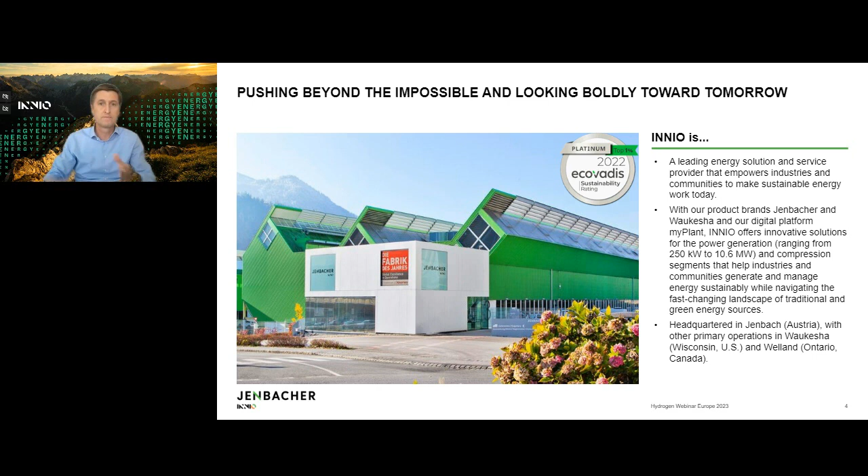Our Jenbacher solutions provide power, heat, and cold for multiple applications worldwide, from commercial customers to utilities, municipalities, IPPs, to greenhouses, to data centers. The worldwide installed base of Jenbacher is 25,000 engines, which produce approximately 37 gigawatts of power.

55% of these engines are installed in Europe, and 55% of these are already today running on renewable gas, including biogas, biomethane, landfill gas, sewage gas, etc.

What this page also shows, respectively the map on this page also shows, are the current commercial hydrogen installations, which are either already running or which are going to commercially run on hydrogen soon. As you can see on the page, most of them are located in Europe, but we also do have installations already in the Americas and in Asia. Klaus Huber, my colleague, is going to talk more in depth about many of those installations a bit later today.

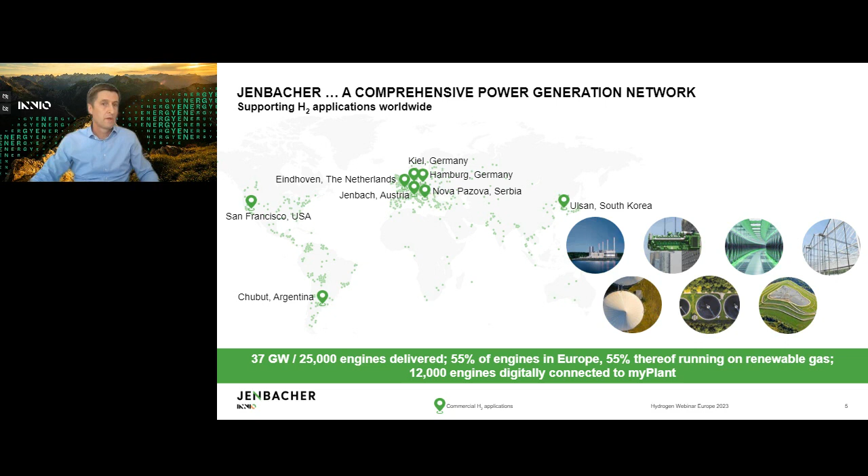Now, about the very dynamic development in the energy linked with the energy transformation in Europe. It is really not easy at the moment for investors in the European energy segment to keep pace with the ongoing fast changes, given all the dynamics around fuel availability, fuel costs, electricity costs, incentives, feed-in tariffs, etc., you name it.

Probably most of you know the main European frameworks which drive the overall direction. These are the European Green Deal, associated with the European taxonomy scheme, and the so-called REPowerEU initiative, with its main focus to reduce Europe's dependency on Russian fossil fuels and also to fast forward the green transition. But there are many other overlapping dynamics and challenges which we face in the energy segment in Europe at the moment. You see those on the right side of the page.

I tried to put them down. For sure, it's not a complete list, but I'll just walk you quickly through those.

These main dynamics and challenges are, of course, the energy supply security in Europe and the energy cost and price rally, which both are major topics since Russia attacked Ukraine last year. Then we have the capacity market needs, meaning the need for fast dispatchable power generation in order to balance the intermittent renewable power coming from PV and wind, photovoltaic and wind.

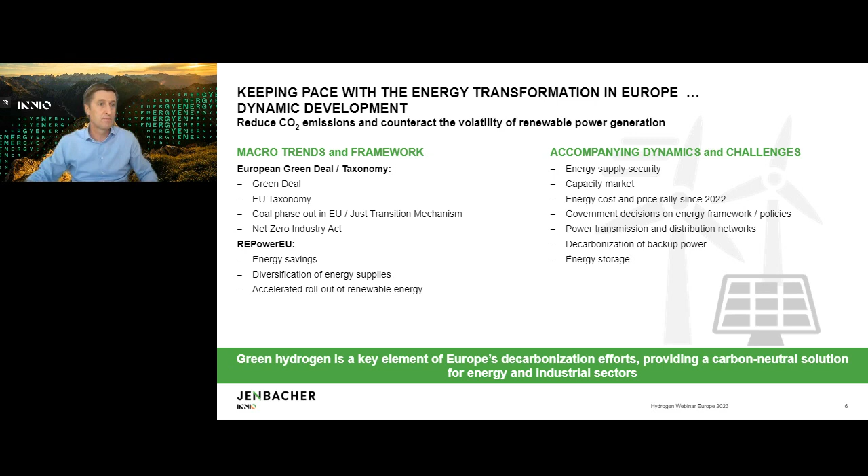I would like to get started with explaining why we need hydrogen for electricity storage. There are a lot of technologies around for storing electricity. The most known is batteries. They are widely used today. But when it comes to larger storages, larger amounts of storage for a longer time, there are other technologies like pumped hydro storage or compressed air storage.

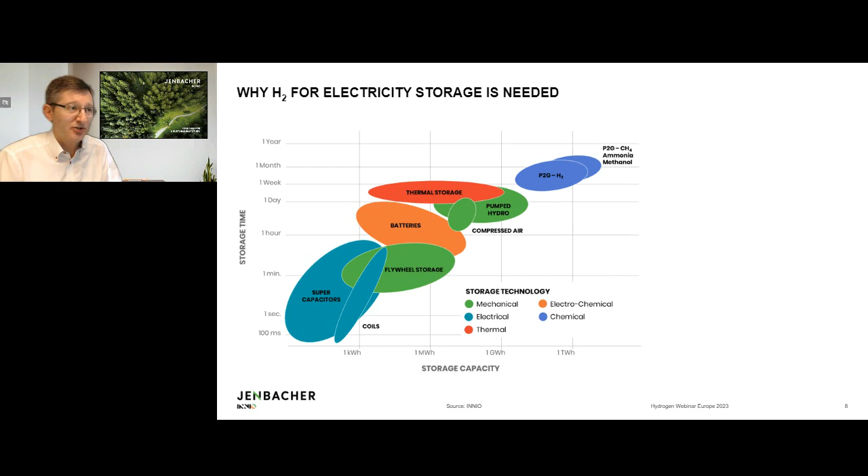And when we go even bigger, to terawatt-hour storage and storage of electricity over months and over seasonal storage, then we end up with hydrogen. Just one example: if someone is looking for 20 gigawatts of electricity storage over just 2 days, then this is 1 terawatt hour. This would be a dark doldrum over 2 days only, but this can last 2 weeks, as we know.

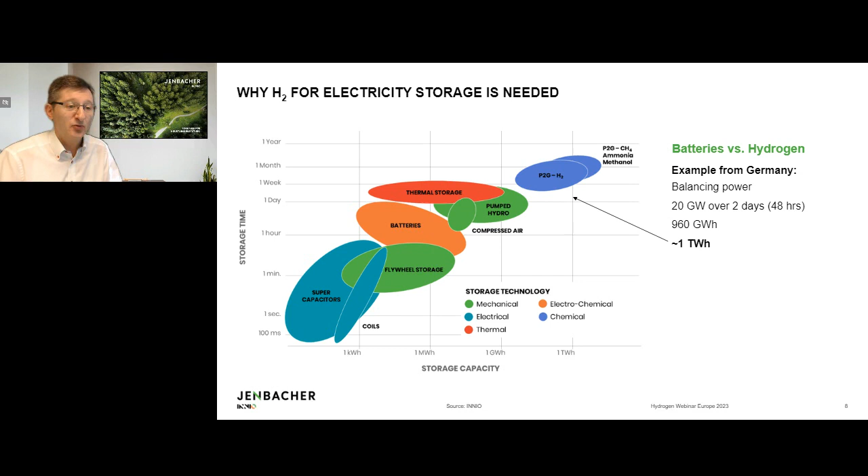So on this chart, you see an example from Germany in 2017, over 3 days, where there was a lot of wind and solar on the grid, but then suddenly this changed and the fossil power plants needed to take over about 20 gigawatts.

And we did a comparison. If one needs to provide 1 terawatt hour of electricity with batteries, that would be a lot of batteries, and just the capex of these batteries would end up with 480,000 million euros. Compared to a hydrogen plant covering this 2 days, that hydrogen power plant would cost about 16,000 million euros, so 16 billion. That is a ratio of 1 to 30 - batteries would be 30 times more expensive.

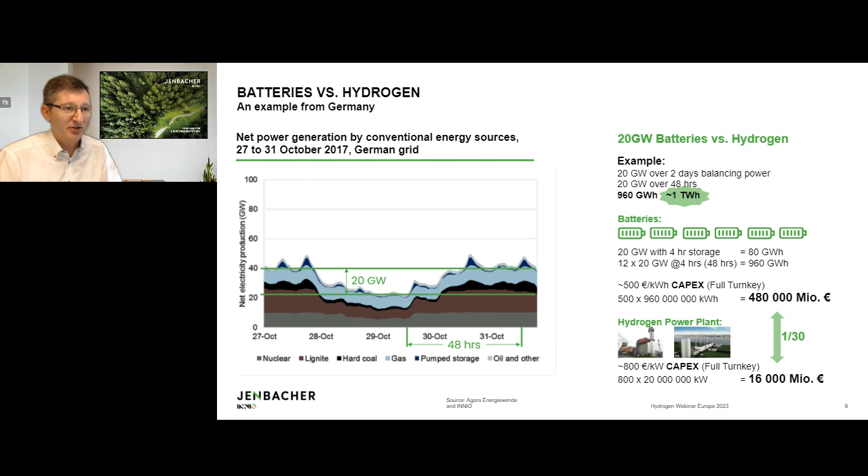That's why hydrogen is needed, and hydrogen is the better solution for longer time and large energy storage.

So when we look at hydrogen, we hear a lot about green hydrogen, blue hydrogen. Blue hydrogen can be produced out of natural gas. Natural gas, we know, is typically directly used to produce electricity, and then electricity is converted to end energy, whatever it is. Blue hydrogen would be produced out of natural gas, adding a steam methane reforming plant, upgrading the natural gas to hydrogen, and sustainably storing the CO2. That ends up with additional power and losses, and as a result, we need more natural gas to produce the same amount of electricity.

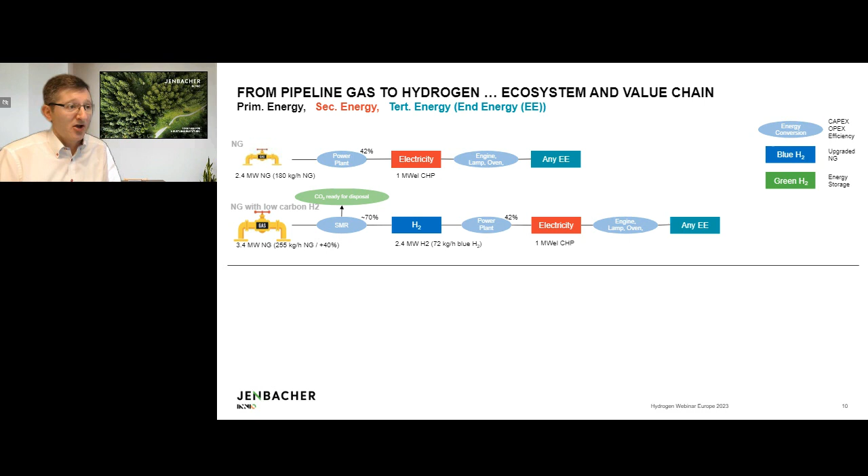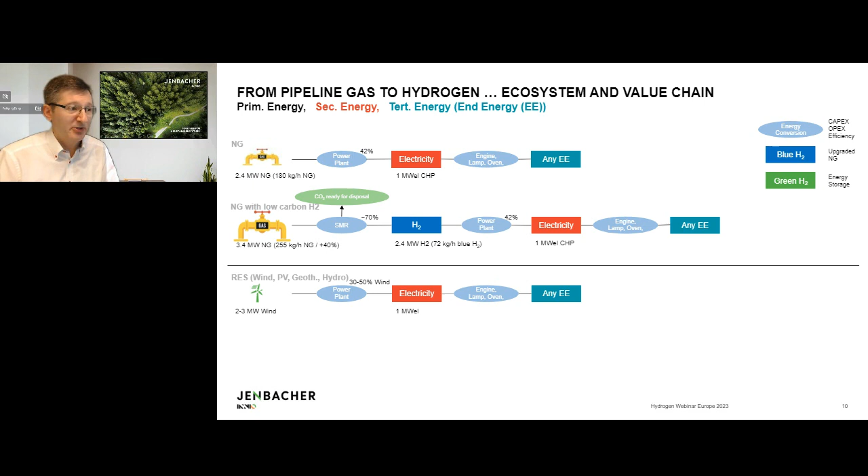More in focus, we have renewable hydrogen. Renewable power will grow significantly with wind and solar, and it is, of course, the best way to use this renewable power directly for whatever we need, the electricity. But for some time, especially for winter times, we need to store some renewable power, and this, as explained before, can be done in large quantities via hydrogen.

Of course, this needs a conversion from electricity to hydrogen. Then you need to compress hydrogen, store hydrogen, distribute hydrogen later on in wintertime to distributed power plants, and then convert it back to electricity. This has a lot of losses with it and ends up with the need for much more renewable power for the same amount of electricity we use at the end. But this is the only way at the moment to do large energy storage, electricity storage over longer time.

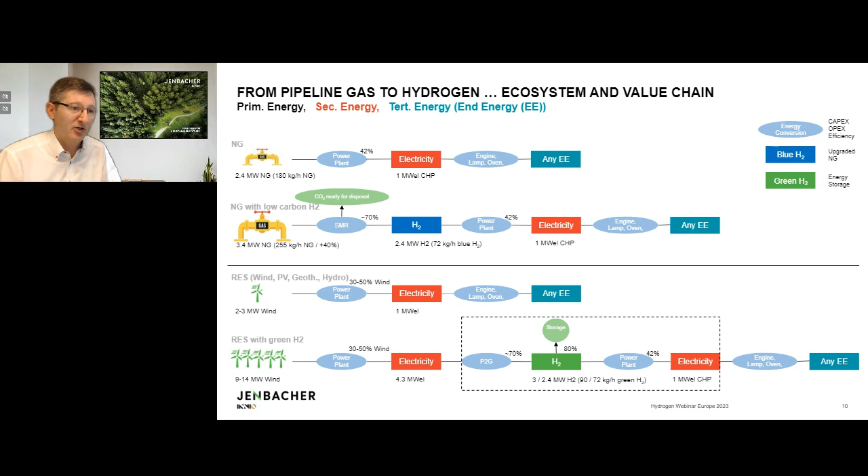Now this hydrogen needs to be stored. There is local storage in tanks, but longer term, a hydrogen network is much more feasible. That hydrogen network is already under development. Hydrogen hubs and hydrogen clusters will emerge first before these smaller networks connect to a big network across Europe.

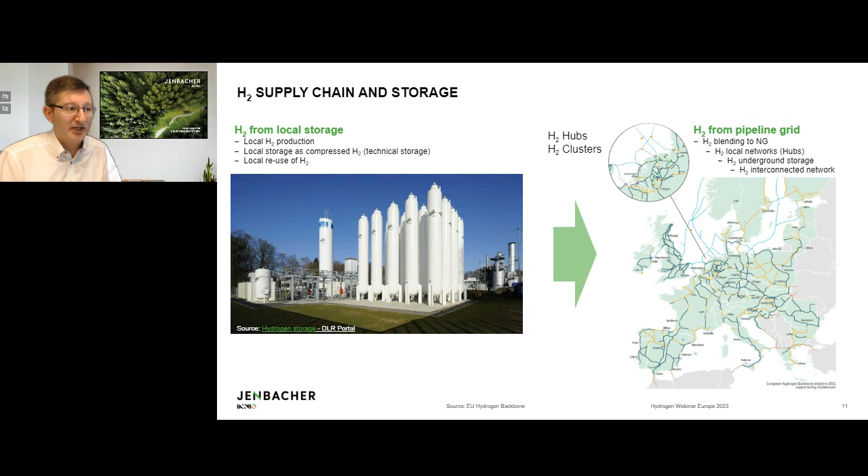Green hydrogen today is pretty expensive, typically costing more than 10 euros per kilogram. In the future, bigger international studies show that hydrogen from green sources could be much more competitive and comparable to natural gas today.

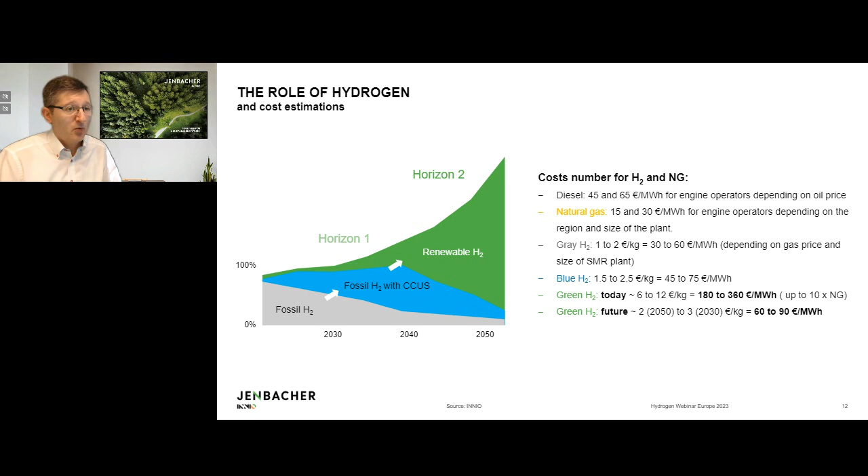So where do we see the most attractive applications for gas engine distributed power at the beginning? We see data centers as an example, where hydrogen could be stored locally and used as a backup solution. But also hydrogen hubs and microgrids could be a solution that emerges first. Then there are industrial applications where hydrogen is available from an industrial process. Islands could also be a solution where hydrogen fits in the early stage.

Later on, when there is a hydrogen pipeline system available and large amounts of hydrogen are available, bigger balancing plants and CHP plants become feasible to run on hydrogen.

So let me show you some project examples of what we do already today. One step back - over the last 25 years, we did a lot of projects with process gases containing a high hydrogen amount. We did 90 projects in 28 countries, totaling 250 megawatts of installed capacity. I'll show you 3 examples.

From the left, those are 4 engines that run on a very high hydrogen fuel, because when we look at this hydrogen-nitrogen fuel constitution, about 95% of the fuel burning is hydrogen. So this is more or less a pure hydrogen engine, and those 4 engines have run over 25 years, all achieving 200,000 operating hours.

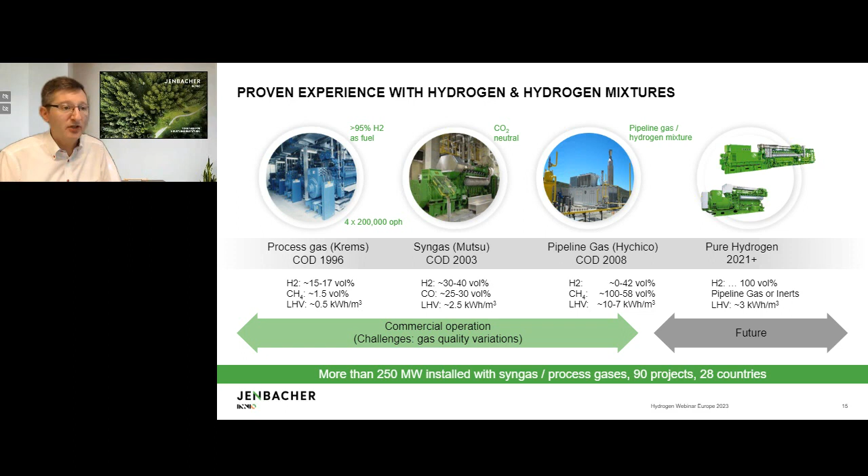Going forward, we're looking more to 100% hydrogen applications. This example with mixing hydrogen to natural gas is located in Argentina. The project is called Hychico. It is a region with a lot of oil and gas activities at the moment, but also with extremely good wind conditions.

About 15 years ago, there was a small wind plant with about 6 megawatts installed, with a very high capacity factor of over 50%. They also installed 2 electrolyzer units with 0.8 megawatts producing hydrogen that is stored underground in an empty gas field. When there is not enough wind available, this hydrogen is used to blend with the natural gas in the local gas engine - a J420 gas engine - which runs with up to 42 volume percent hydrogen.

Up to 27 volume percent of hydrogen, there is no power derating. Between 28 and 42 percent, there is some power derating of the engine. This engine has run for about 15 years now and has achieved more than 100,000 operating hours.

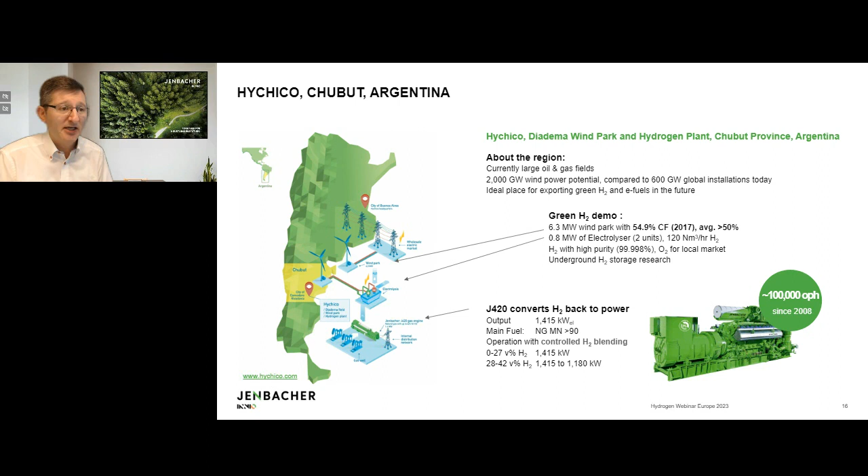This is a picture from the site in Argentina. On the very left side you see the J420 containerized solution. In the middle you see these electrolyzers. Then there's an oxygen plant as a byproduct from the electrolyzer. And on the right-hand side, you see some pictures.

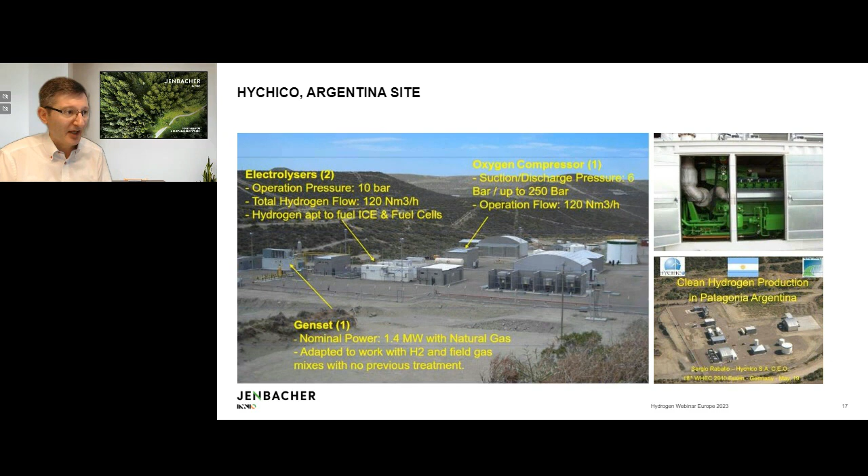At 100% hydrogen, there is some derating of this engine to about 600 kilowatts, but the total efficiency is about the same. What's very interesting is the NOx emissions went down: on natural gas this engine runs at 250 milligrams, on hydrogen below 100 milligrams per normal cubic meter.

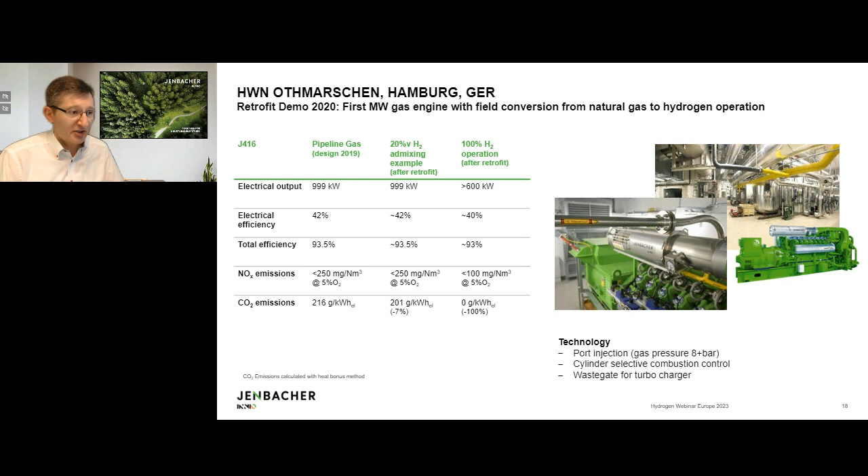Matthias will talk a little bit more about what technology is needed to run this engine on 100% hydrogen.

Another engine, this J420 engine, is already delivered to South Korea. This engine can run on both fuels, pipeline gas as well as 100% hydrogen. It shows the same output because it's optimized for the same output on pipeline gas as well as on hydrogen. It has a little bit lower electrical efficiency because it is a 60 Hertz application and a customer-dedicated genset solution. This engine uses hydrogen from a byproduct of polypropylene production and is installed in Ulsan, South Korea.

The engine is already delivered and will go into commercial operation in summertime.

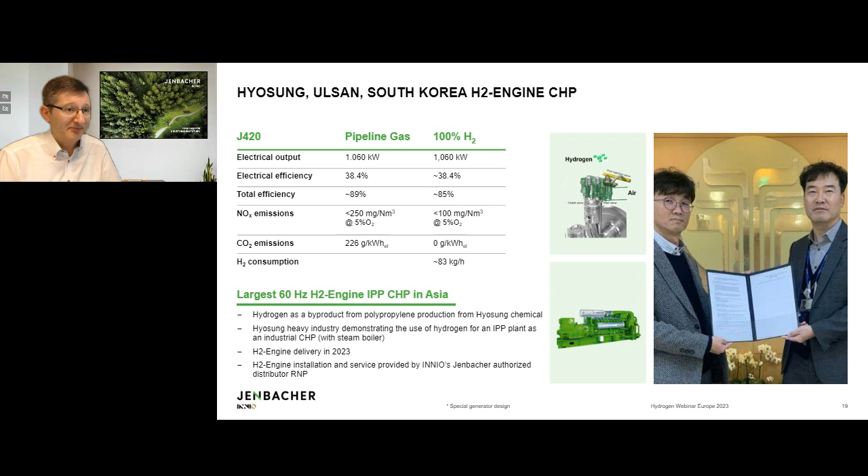A very exciting project is this with NorthC Datacenters in the Netherlands. As I explained before, data centers are a focal application for us because this could be a very emerging solution for hydrogen engines. This customer runs about 15 local data centers, smaller ones, not large data centers, in the Netherlands, Germany, and Switzerland. They want to be completely carbon neutral until 2030. At the data center in Groningen, they installed some fuel cells, but at the new data center in Eindhoven, they selected 6 Jenbacher hydrogen engines.

These 6 hydrogen engines each produce 1 megawatt. As you can see on the right-hand side, there's a hydrogen supply, typically by trucks today, because there is not a hydrogen pipeline available. There's a local storage of hydrogen, and out of this local storage, the 6 engines can run about 1 hour.

Typically, electricity failure takes less than 1 hour, so we estimate about 80% of electricity failures where a backup solution is required can be covered with hydrogen. But in case the electricity failure takes longer and the engines run out of hydrogen, the engines can smoothly switch over to natural gas operation and continue to provide backup power.

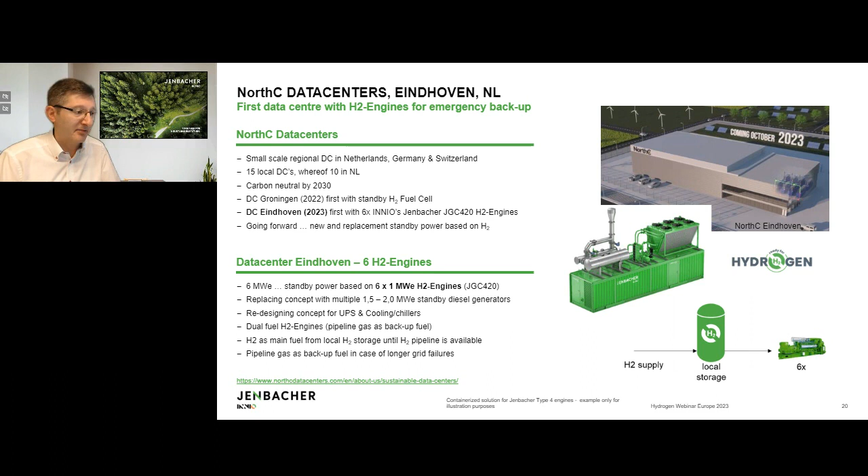Another very exciting project is this project in Serbia called Pan-Ledi. Pan-Ledi is an operator of fuel stations in Serbia. They concentrated a lot on CNG and LNG, and in the future they will do more on electric vehicle charging stations and also hydrogen charging stations.

They installed in Cuprija, in the south, a 12 megawatt PV plant. They produce hydrogen, have local storage there, and then bring this hydrogen by trucks, by trailers. We call it the virtual hydrogen pipeline, to north of Belgrade, where they run a CHP unit with 1.3 megawatt output. This engine can run on hydrogen as long as it's available, but can also run on natural gas to provide sustainable power. Heat will be used by a nearby commercial off-taker.

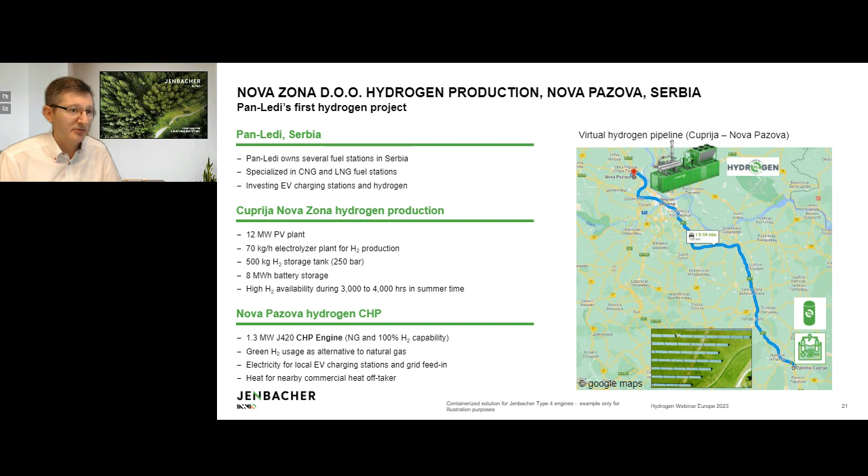The customer had really a focus to run this engine as efficiently as possible. That's why he is looking very much to run this always-on in CHP application.

One other project in California, where Raven developed a steam CO2 reforming process to produce syngas out of organic waste. This project is located in Richmond, California, and the syngas produced there has about 55 to 65 volume percent hydrogen.

This syngas is then cleaned up, and a high purity of hydrogen is produced, with about 99.999% purity, suitable for transportation purposes.

But there is some tail gas left, and this tail gas, together with landfill gas, is used in three 420 gas engines. The hydrogen content is then about 10% in total when using this mixture. The electricity produced with these 420 engines is then used to run the electricity supply of the whole gasification plant.

Under California's Low Carbon Fuel Standard, the hydrogen will achieve a negative carbon intensity credit.

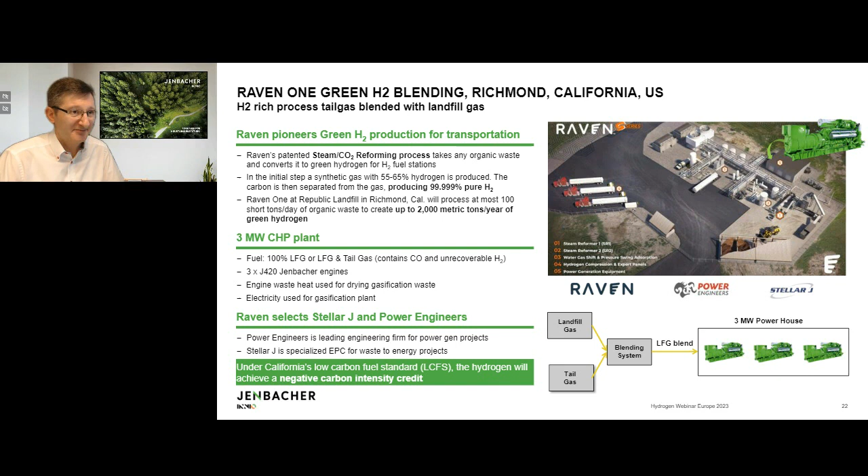Just looking a little bit to the future, what could be the future application for hydrogen? We just announced that together with Stadtwerke Kiel, they are planning to convert this large CHP plant from natural gas to hydrogen operation by 2035.

In 2019, this plant replaced an old coal plant, and currently this CHP plant is running on 20 Jenbacher 920 gas engines, producing 190 megawatts of electric power and 192 megawatts of thermal power at a very high total efficiency of 91%. This gas engine power plant is also very flexible.

It can ramp up and down in less than 5 minutes. The customer wants to be carbon neutral, carbon free, even before the German deadline of 2045. So by 2035, it's the customer's plan to convert this pipeline gas CHP plant to a hydrogen plant. Of course, hydrogen needs to be available at that time.

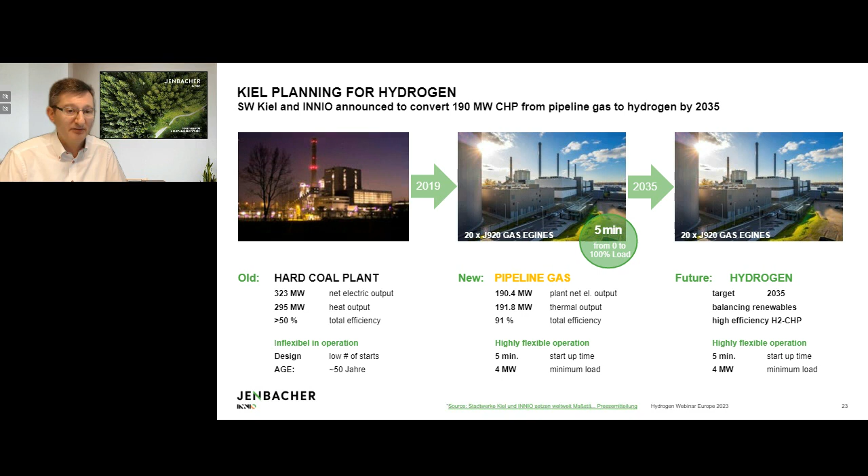So a lot of people talk about readiness for hydrogen. We did our own definition to explain to our customers what we mean when we say our engines are ready for hydrogen. In general, for Jenbacher engines, this means all of our engines can be converted from pipeline gas to 100% hydrogen operation in the future. Of course, every project is a little different, and it needs to be clarified what is the best solution to convert individual engines from pipeline gas to hydrogen operation.

A lot of people talk about mixing or blending hydrogen into pipeline gas, and that's why we prepared a solution so our engines can cope with up to 25 volume% of hydrogen in pipeline gas. As you saw in the examples before, we already have a Type 4 engine that can run on 100% hydrogen. From 2025 onwards, we will launch more engine types able to run on 100% hydrogen.

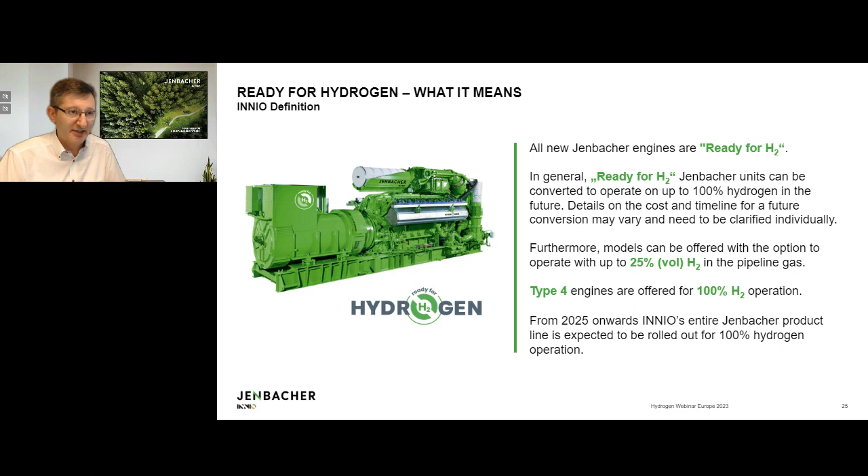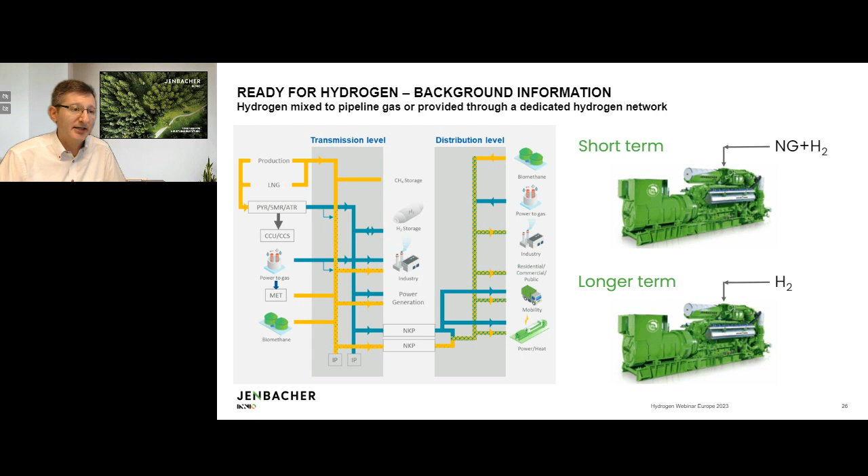Just a few words about blending hydrogen into pipeline gas. This can be done at the transmission level, but we think it will be more common at the distribution level of natural gas pipeline systems, before a bigger dedicated hydrogen network is developed and in operation. So short term, we could see some hydrogen blended into natural gas. That's why we are preparing for these hydrogen blends in natural gas, but longer term, we will see more dedicated hydrogen applications. It's important to understand what blending hydrogen into pipeline gas actually means.

Here's an example: blending up to 20 volume% of hydrogen into pipeline gas changes the Wobbe index and changes the methane number, which is more important for gas engine operation. For example, 20% hydrogen changes the methane number by about 10 to 15. But also very important is the change in the lower heating value — 20% hydrogen reduces the lower heating value by about 15%. This can have a huge impact on the billing of the gas.

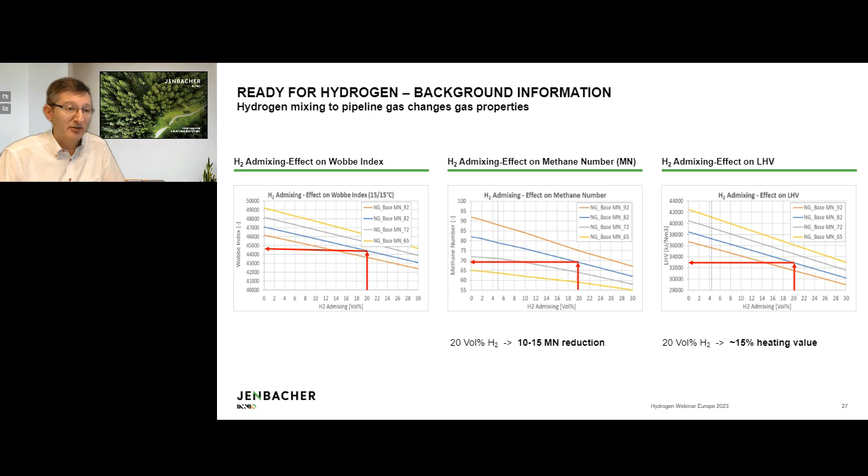Just to make sure everyone understands: 20% hydrogen blending into natural gas means just 7% decarbonization. That's because we talk about volume% of hydrogen, not energy. By volume, the lower heating value of hydrogen is less than a third compared to natural gas.

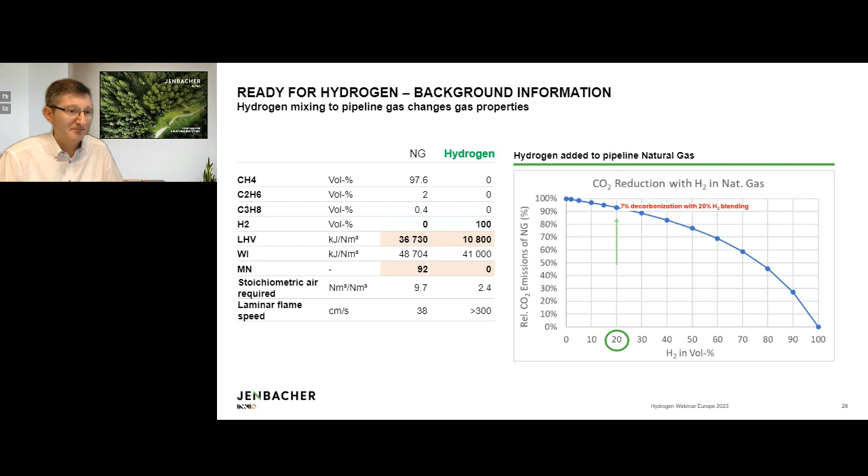So with that, I would like to hand over to Matthias to explain a little bit more about the technology.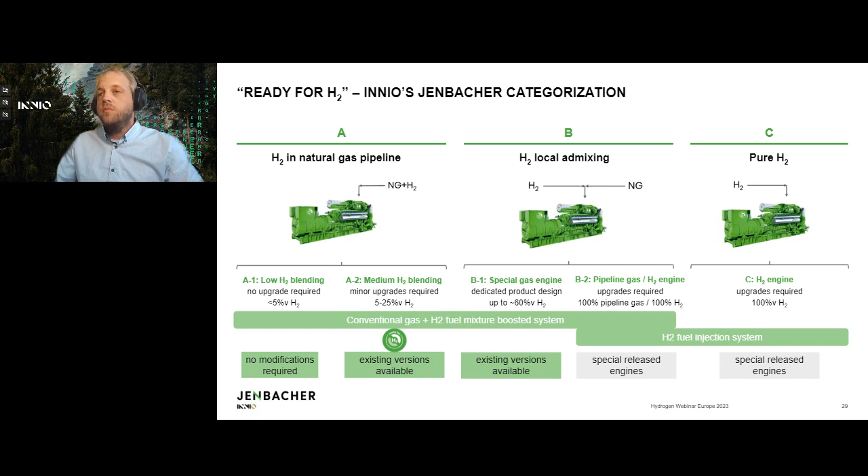For up to 60%, we're talking about a special gas engine designed for this range. Many of you might be familiar with syngas operations, where we typically see these H2 concentrations, so here too we have existing versions available. For blending and pure engine operation on hydrogen, we have special released engines. The big difference is in the fuel injection system, where we transition from a pre-mixed fuel system to a port fuel injection system, which we'll discuss more in future slides.

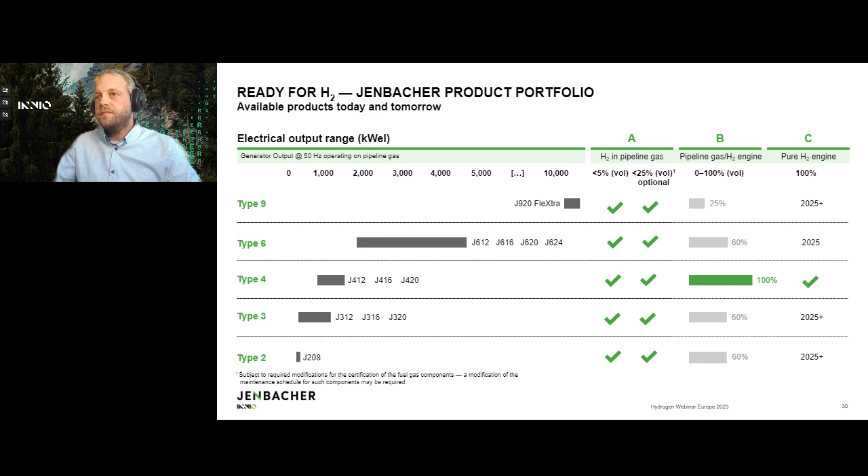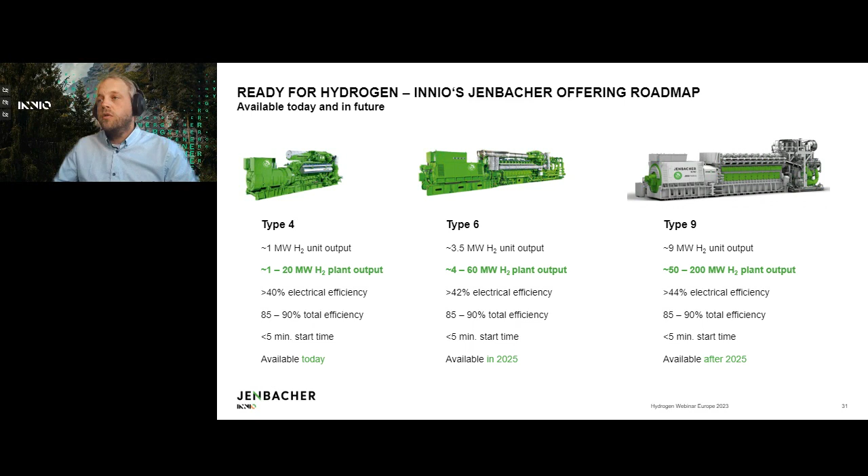Now let's take a closer look at the subcategories in terms of some details here. One certainly very interesting area is our 5 to 25% hydrogen admixing category, which is category A2.

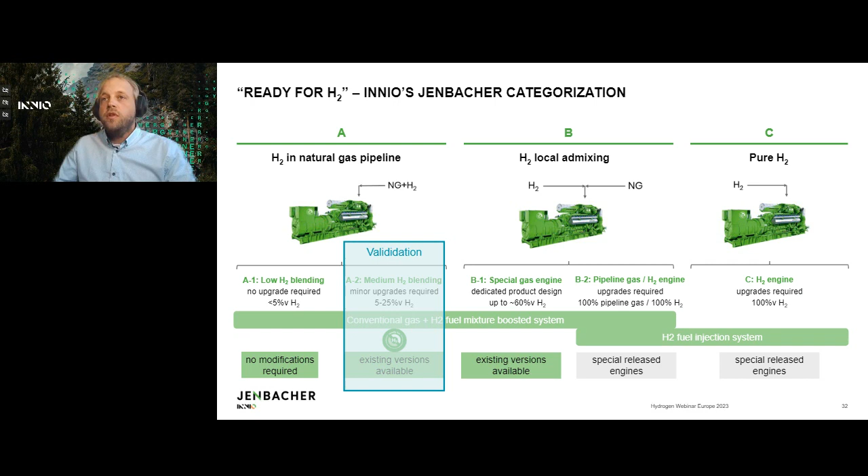Klaus already showed you the impact of hydrogen on the fuel properties. What he didn't mention in detail is that hydrogen also has a much higher laminar flame speed compared to methane or natural gas, and its ignition window, the ignitable range for concentrations of hydrogen with air, is much wider compared to that of natural gas. Same is also true for the ignition energy that is required. Hydrogen is a much more reactive fuel compared to natural gas.

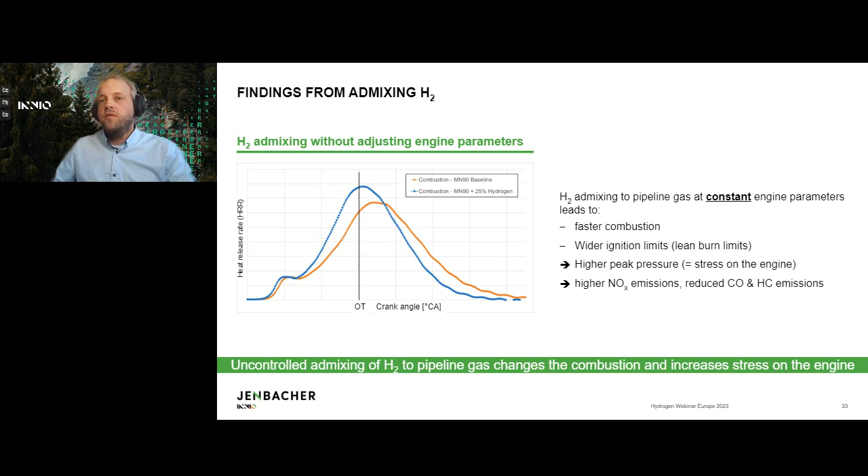The good news is that INNIO Jenbacher and the engineering team has not only recognized this topic of different fuel properties, but we have developed a compensation tool, a compensation software, that we can apply to our products. Based on the H2 content up to 25%, we can take measures to compensate for the different fuel properties, and therefore keep the NOx emissions flat at the baseline case for 0% admixing. And for the peak firing, we maintain the same peak firing pressure as for natural gas operation.

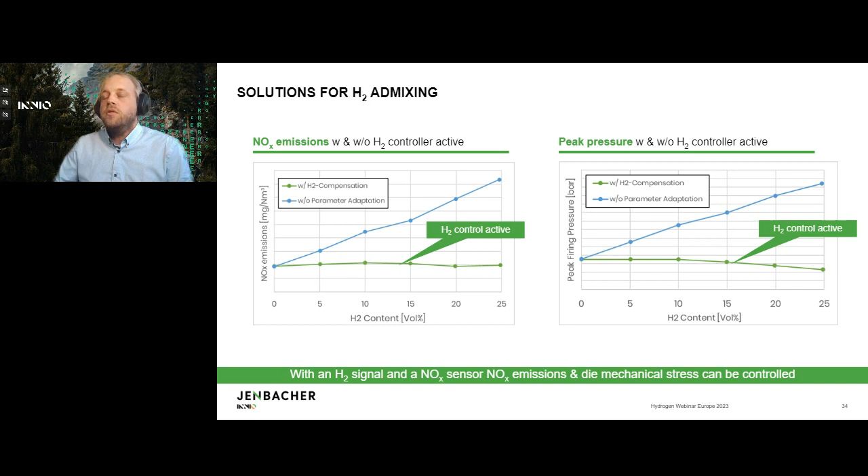The way we do that is we need information on the H2 content in the fuel gas, and we can either do that with our own sensor that we supply with the genset, or with external information from a local mixing system, for instance. Then it really doesn't matter if we're running at 5, 15, or 20% hydrogen. The compensation software automatically adjusts the engine operating point so that emissions and peak firing pressure stay constant compared to the natural gas case. Therefore, users and customers don't have to worry about switching software or parameters on their genset as hydrogen is introduced to the fuel stream.

Now, before we go into the other categories, let me quickly take you to a site visit to our Jenbacher facility, because the key question might be, how did you do that? Because clearly there is no hydrogen in the natural gas network yet.

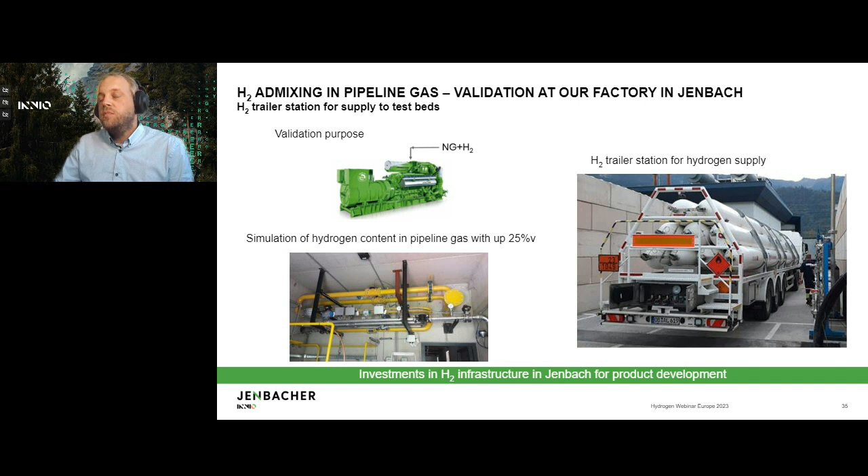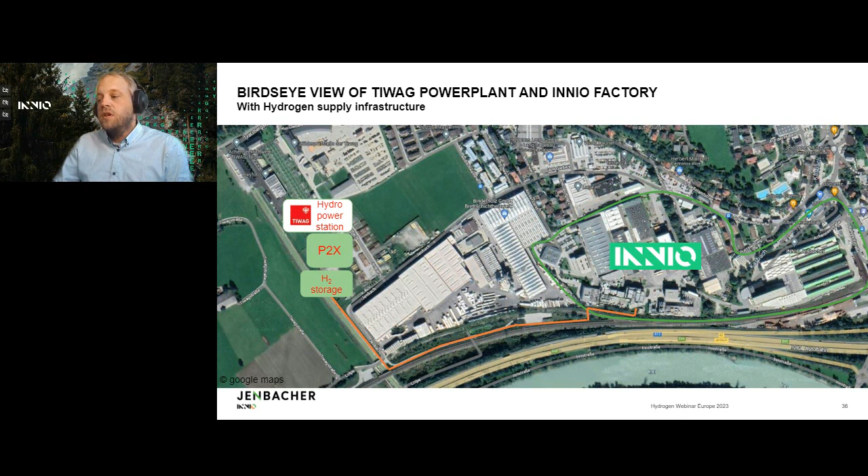And then there's a pipeline that runs across the railway, close to our factory, into the factory, and connects there to the existing pipeline network that we used with the trailer previously to provide hydrogen to our facility. This will become active in mid of next year.

We have chosen PEM electrolyzers to serve this task. We are looking at an installation of 2 stacks with 1 megawatt capacity, which will give us about 35 kilogram of H2 production per hour.

Now, clearly, that is not sufficient to directly feed an engine from that. So we also have a 1,000 kilogram storage tank, and we basically run the electrolyzers 24/7 to buffer the H2 in a tank. Then we can consume it at significantly higher discharge rates with our engines for the matter of several hours or a complete shift, depending on what engine type we're looking at. Then we stop our operations and recharge the tank. The entire setup is made such that we can easily expand to that in the future.

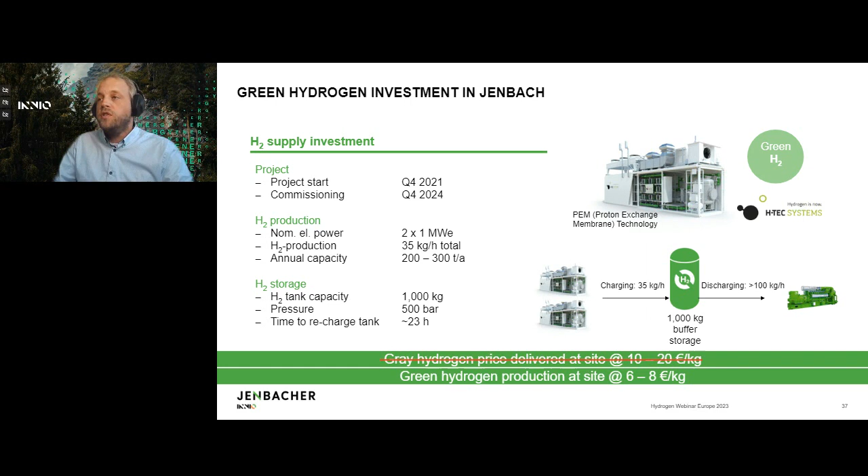Biggest advantage here, we're also moving next to capacity. We're also moving away from gray hydrogen at a higher price tag to truly green hydrogen from hydropower at a much lower price tag, which enables us to do more efficient, more cost-efficient product development in the hydrogen space.

Now, let's take a look at local admixing with up to 60% hydrogen. As I pointed out earlier, for these up to 60% hydrogen in the fuel system, we're looking at applications in the syngas space, for instance, or wood gasification plants. And here we have a long history and many sites that we use to run with different H2 concentrations. We have dedicated gensets and combustion systems that have been developed in the past by our special gas team on the topic of hydrogen combustion up to 60%.

I don't want to go through all of the various installations that are listed here. Klaus already pointed the HanseWerk out with up to 100% hydrogen, also the site in Korea. But there have been many more sites where we have vast experience with high hydrogen concentration in the fuel.

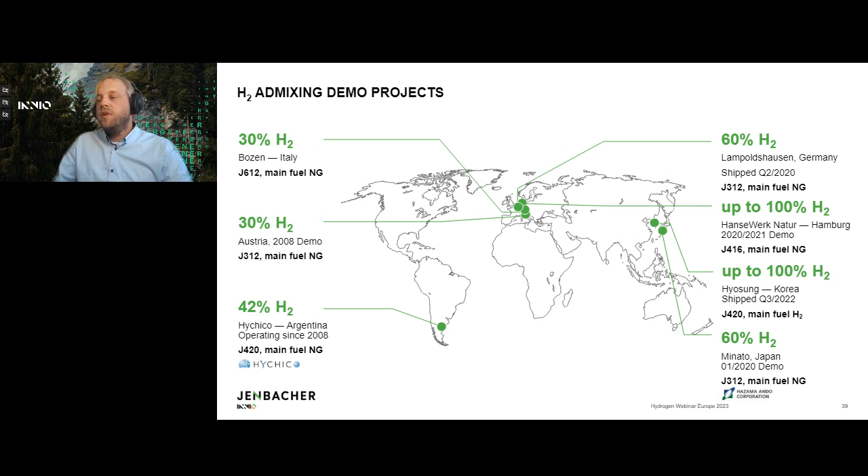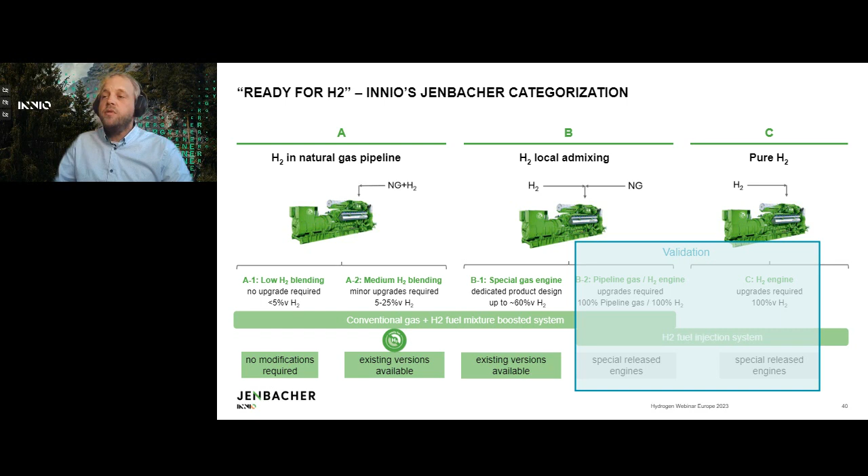And we're now really making the transition to 100% H2 operation, which I think is the most interesting case. Here we're talking about special released engines, and we're also talking about a switch in the fuel system. As I pointed out earlier, we're going from a conventional pre-mixed combustion or pre-mixed fuel system to a port fuel injection system.

The top of the line here from our product portfolio is our Type 4 engines that can run on up to 100% hydrogen. Really, you can also have this as a dual fuel product where you can run virtually anything from 100% natural gas to 100% H2 at any blend ratio that you desire.

The technical data depicted here is really for our 100% H2 product. You can see we're going from 620 to about 1 megawatt in electrical power output with efficiencies above 40%. The total efficiency is at a comparable level to our natural gas products.

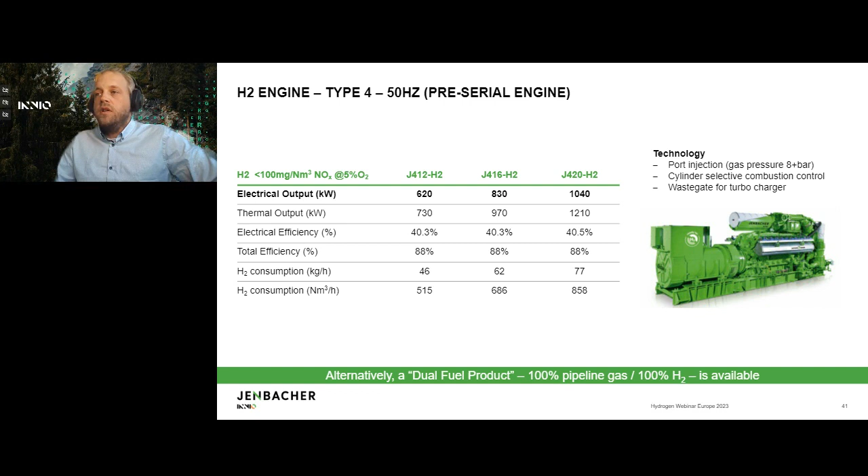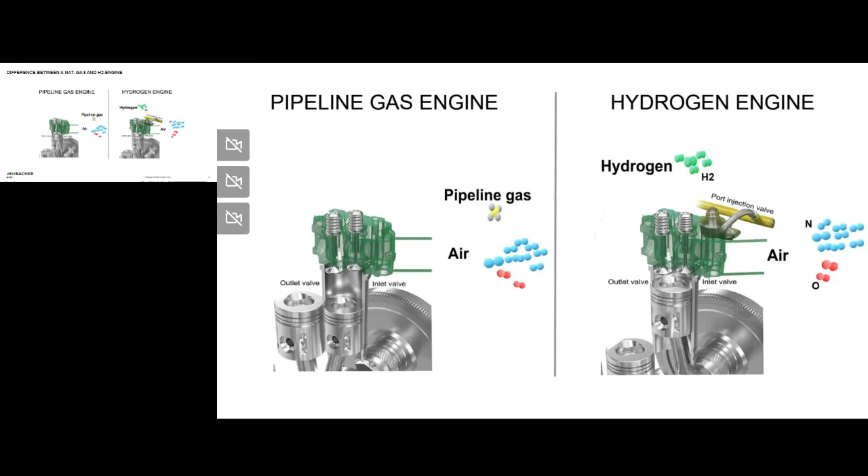But let's take a little bit of a look at the details of the fuel injection system. As we roll the video here, you will see on the left-hand side the conventional system that is used in terms of pre-mixed combustion. Here we use a gas mixer that mixes air and gas prior to the turbo, or prior to compressing it in the turbo, and we feed the mixture through the aftercooler and the intake manifold to the engine, where the mixture is combusted.

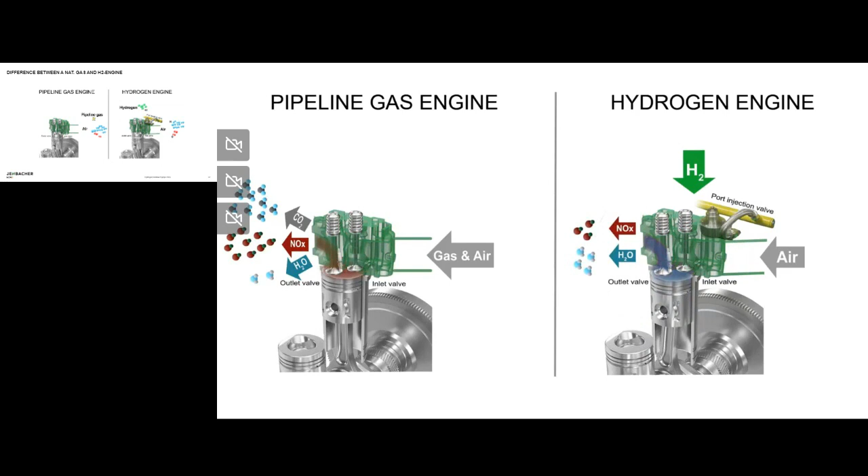Now for hydrogen, we have chosen port fuel injection for a couple of reasons that I'll talk about in a second. But the big difference here is really that we use an electronically controlled valve that is mounted very close to the intake port, and we introduce the hydrogen just before it is about to hit the combustion chamber, mixed with air just before the combustion chamber.

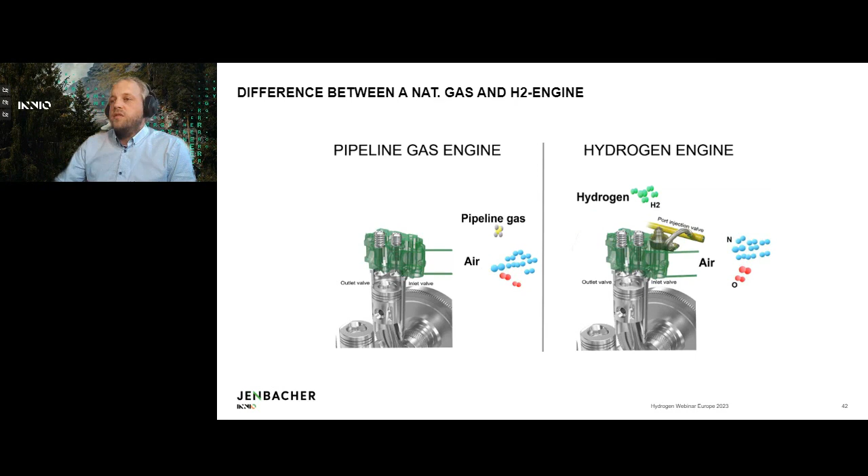The big advantage with that system is that we have much better control over the fuel amount being introduced on a cylinder individual basis. Also, we minimize the volume present within the engine system where we have an H2 and air mixture, which is really important for product safety, given the high flammability of hydrogen and the low energy required.

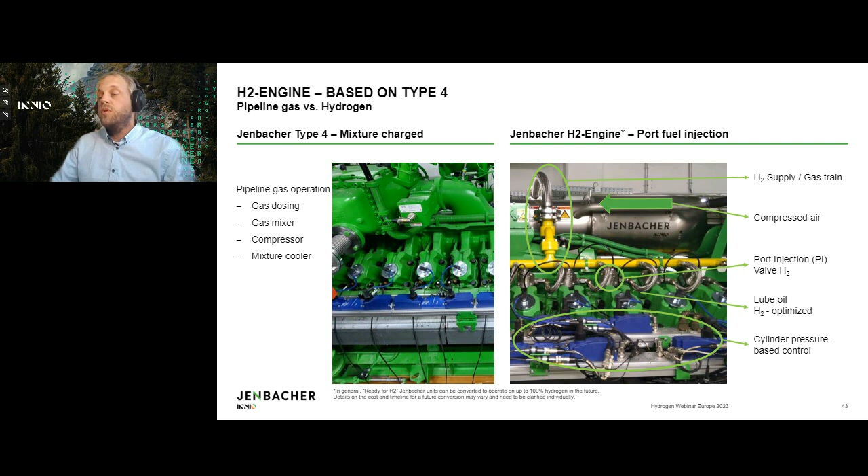So on the left-hand side, you can see the standard product. On the right-hand side, you can see depicted in the circles the H2 fuel rail with the feed lines to the port injection valves, and also the cylinder pressure-based controls and control system for these port fuel injection systems, giving us superior dosing accuracy, much more control over cylinder individual combustion, and most importantly, superior transient performance.

Now, as we get to the end of my slides, there is one important thing I want to leave you with. In many cases, when I talk to customers and listen to people in industry, there is always the fear of being left with a stranded asset, meaning you buy a pipeline gas engine, natural gas engine today, and as hydrogen is introduced to the network, or you want to switch to hydrogen in the future, you might have to purchase an entire new system because the asset is not future-proof and cannot be upgraded.

I want to point out that this is not the case for our products. We really have the opportunity to use the assets we sell today with up to 5% hydrogen, no modifications required. You can go up to 25% with minor modifications, using an H2 signal and the appropriate compensation software, and you can convert your asset to that as well at a relatively low cost.

Moving on to the 100% case, even there it's possible to retrofit existing Type 4 engines for 100% H2 operation. Now the conversion package is getting a bit bigger because we need a different fuel system, but even here you're not left with a stranded asset, you can utilize the system and convert it over to operate on 100% hydrogen in the future.

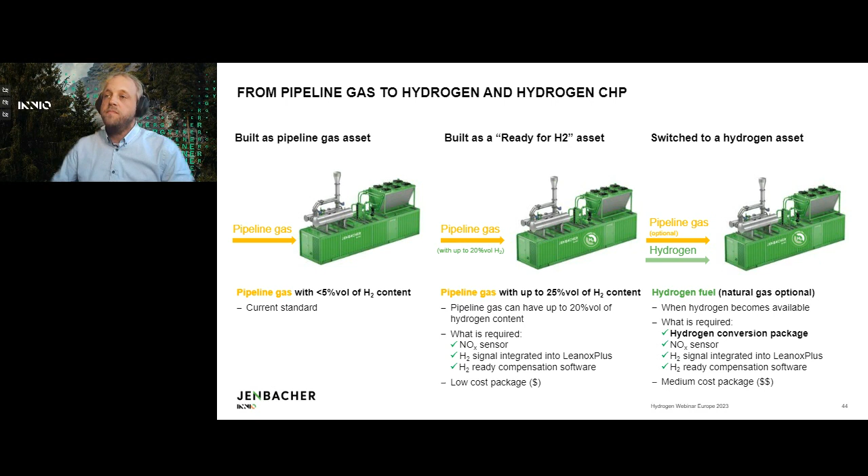With that, I will give it back to Klaus for the concluding slides, and then I'm sure I will hear you again in the Q&A. Thank you very much.

Thank you, Matthias. I will finalize with two more slides, talking about the outlook and development roadmap of engines, explaining how we develop a hydrogen engine, illustrated by the history of what we did on the Type 6 engine.

Here you see on the left-hand side how the Type 6 engine developed over the last 30 years. We increased output by about a factor of 2.5, meaning we are getting 2.5 times more output from the same cylinder over 30 years. And efficiency increased from about 33% to about 47%.

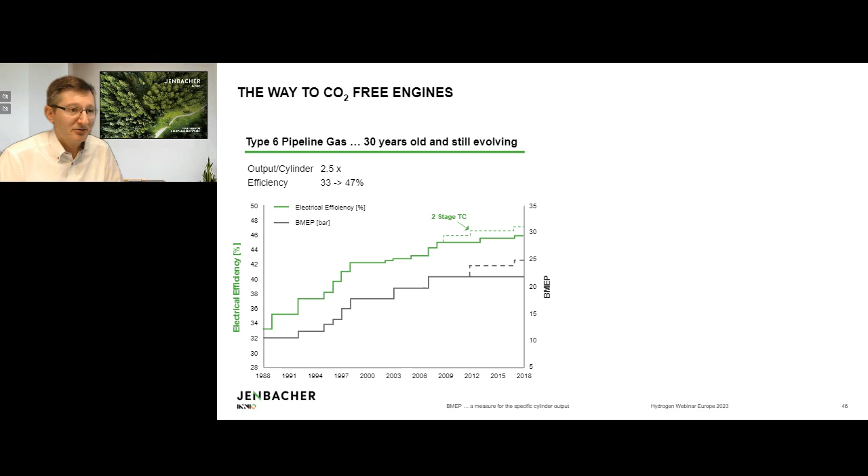A similar roadmap is planned for hydrogen engines. Today we offer gas engines that can also run on hydrogen, or hydrogen engines that can also run on natural gas. Over the next years, we are focusing more on dedicated hydrogen engines and will have similar performance on hydrogen engines as we have today with natural gas engines.

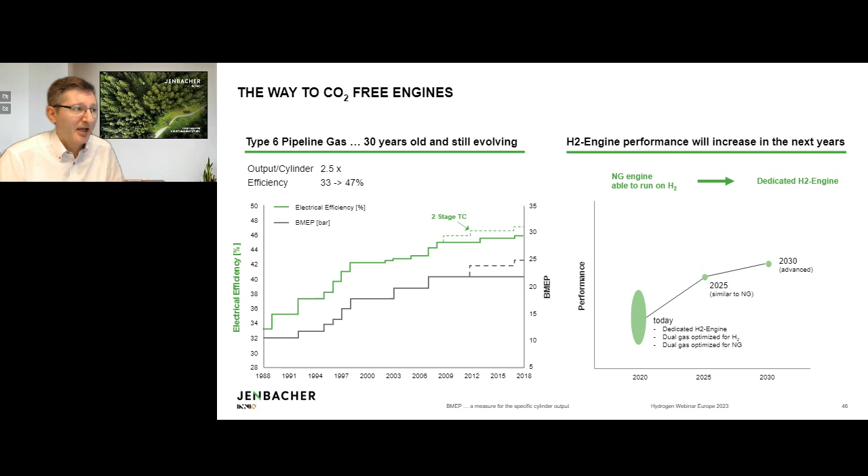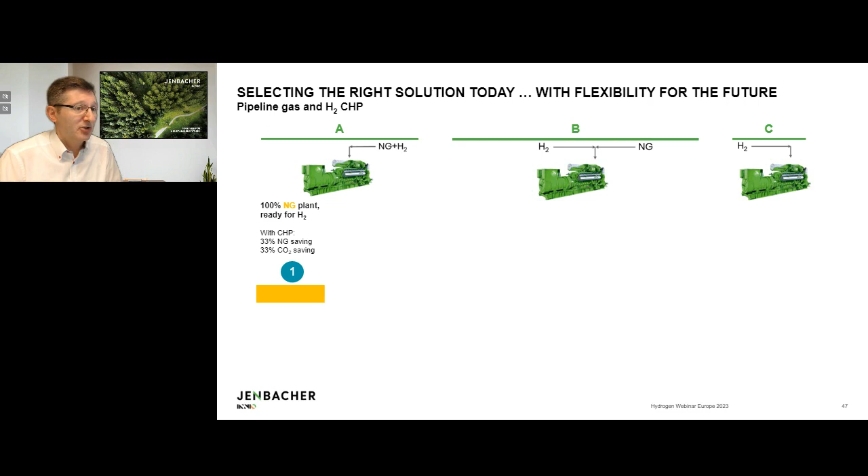In summary: we can offer natural gas engines today that are ready for hydrogen and can be converted to hydrogen later on. These engines can run with a high percentage of hydrogen already today—20% hydrogen in pipeline gas, validated for up to 25%. In the future, that might be 30% hydrogen in pipeline gas. We have dedicated solutions for up to 60% hydrogen blending with natural gas.

We already have an engine that can run on natural gas and optionally on hydrogen—that would be option number 4. The same engine can be optimized for hydrogen operation and use natural gas as a backup solution.

Importantly, all of these engines run in CHP as much as possible, because that allows the engine to run at high total efficiency, get the most out of hydrogen, and achieve fuel savings in the range of about 33%. This is the case for natural gas operation as well as hydrogen operation. Finally, when there is enough hydrogen available, we can provide dedicated pure hydrogen engines, but that will still take a few years.

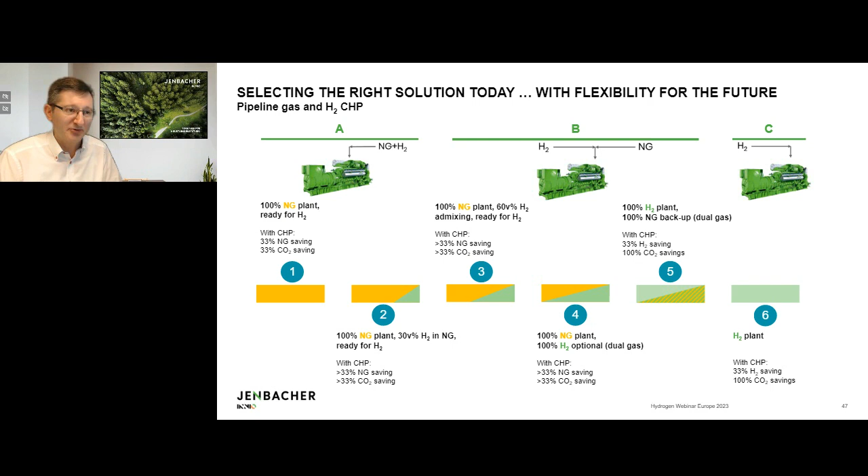So with that, we are at the end of our presentation and are happy to take some of your questions.